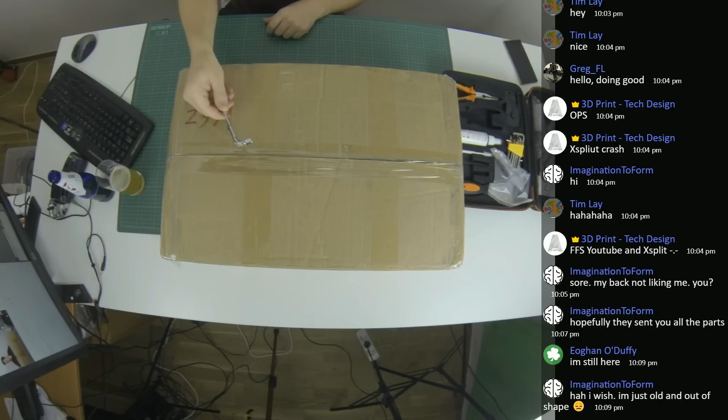I think we should start getting this up and running here. This is not the tool to cut up a box. I'm gonna switch tools. I have my trusty printer kit thingamajiggy here, and I got set up a bear cam as well. Well, it's not really a bear cam, but we can have it look at bear, or we can look at details, or look at how the studio is set up right now.

So this is the table that we are working from. We got the computer, we got a bunch of stuff I don't think I want to show you, and we have some cameras set up, and audio and GoPro in the roof and stuff like that. So that's going to be pretty fun. And let's see if we can start opening the box. How is the audio levels, by the way? Does it work? Is it fine?

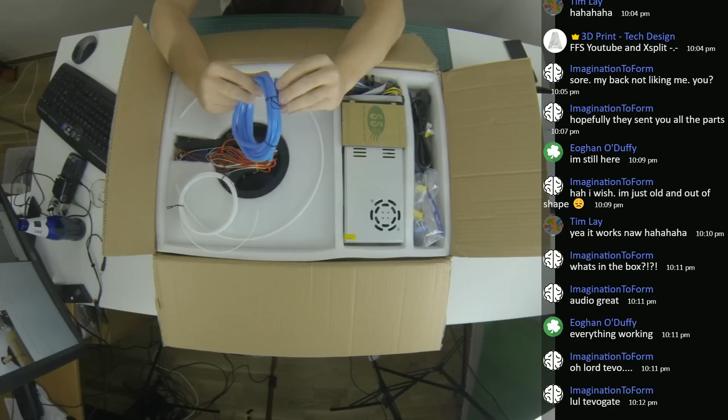Okay, we also got a lot of different stuff here. We have, not exactly sure what this is. It doesn't really look like a cable connector, but it's probably something.

We're gonna run out of space almost immediately, so I'm just gonna take this printer kit away for a few seconds, see if I can build some sort of array of stuff here. Okay, so we got that.

We got a memory card, SD card, that's very nice. We got some filament. That's not a lot of filament. Holy moly, that's a little bit depressive. But okay, maybe we can do something with that.

Bowden tube, interesting. Everything's probably gonna fall off here in a few minutes. Ooh, USB cable. We got 2 cables for the display, very nice.

So yeah, if you've watched PewDiePie, I'm gonna make PewDiePie jokes like all day. Very nice. Sweden unite? No?

Okay, we also got some cable for the stepper motors. Creator Pro clone. Yeah, I mean, this looks like a very good contender for a big printer, because it should be really easy to put inside some box, or maybe just use cardboard from this box to enclose it. Because what I've heard is that you should probably upgrade or put a different power supply on the heated bed, because it takes apparently forever to heat it up. So that's gonna be interesting to see.

And okay, these power cables still probably have to go into the motherboard. I do have a MOSFET around, but that would probably require to open things up in here, and I'm not gonna do that just yet, but maybe next time. And of course put this to 0 or off.

Cool, big fat power supply, that's nice. And here's a loose part, okay cool, we got some end stops. Clickety clickety, very good, very good.

And I think underneath, whoa! That's a big print surface. Just check that out, that's a really big print surface. Holy moly, this is...

And it comes pre-wired and everything. We have the cables around here. That's very nice, sensor and heater bed, and a cart for them to move.

But oh, Jesus Christ, this is a big build plate. Okay, and is that glass? No, it's not glass, it's... or is it?

It doesn't sound like glass. Maybe it's some sort of interesting surface. Not completely sure, it doesn't look like glass at all. Huh, very nice, very nice.

Okay, I know, I'm gonna stop. I mean, look at this build plate. This build plate is super big compared to my head.

Strange, cool, and we get a very big print surface as well. Oh Jesus, and some really annoying plexiglass pieces that we need to probably cut away. But I'm gonna look at this, and we're actually gonna put this away for now, because we're not gonna need the build plate for a little while.

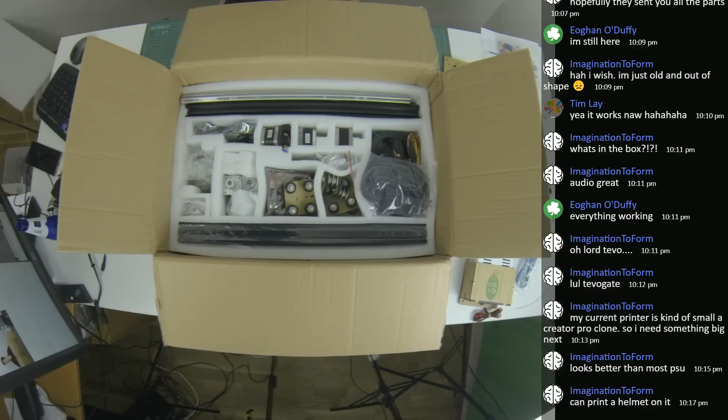Woo, second layer. Now we're getting some juicy details. Some more cable, some belts and cable arrangement. That's good, let's keep those close. We got a pretty well pre-assembled extruder contraption here.

So it looks okay. Let's see, where's the nozzle? Here's the nozzle, it looks pretty cool. I think that's gonna work fine.

We got some auto leveling here as well. Nope, that's not auto leveling, sorry, that's X or Y axis leveling. Yeah, that's a good question. I wonder where the leveling is for the Z axis. And a bunch of wires and connectors for that. But that's good, it looks very nice with the connectors to the extruder.

What else is there? There are some belts pre-assembled. Wow, hey, these are quite well pre-assembled. It looks like we're not gonna do too much assembling here.

Looking at the manual, which I have somewhere around here, let's see if I can find it. I do have the manual on the computer already, but it does look like things are fairly pre-assembled, which is very nice. So these are probably for all the belts.

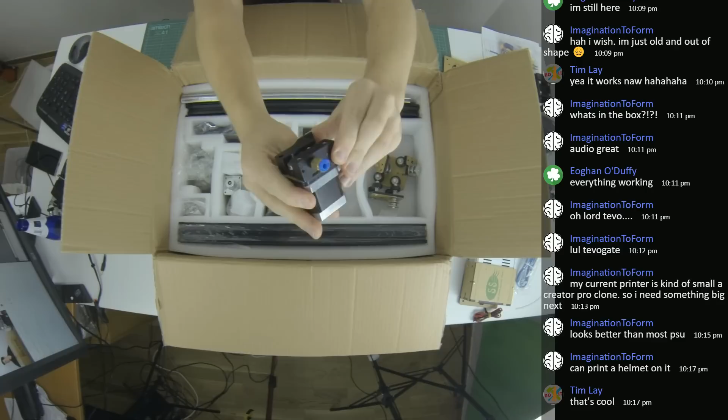We got even more plastic parts that are laser cut. Oh, I got them, this one here. The Bowden extruder, it's pretty far from a Bondtech, but it's an extruder.

Looks okay, aluminium parts, no plastic stuff. So that's nice, it's a little bit strong. What else do we have? We got a lot of bearing holders for the Z-axis.

Get a close up for you.

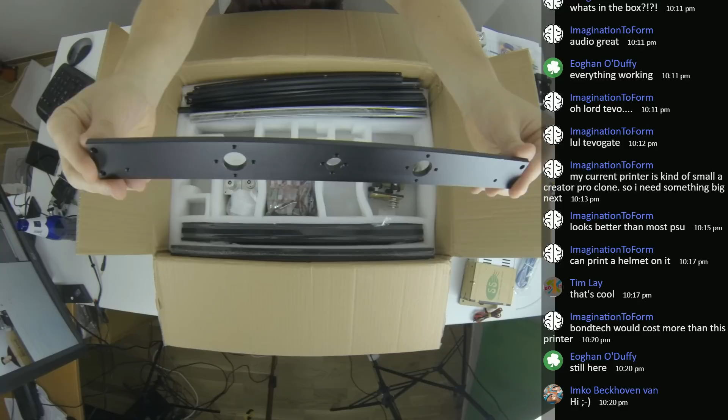Ooh, this looks nice, this looks like some actually good machining. That's pretty impressive, really hard as well, that's pretty nice.

Okay, and of course we have the card here, motherboard. Looks like a standard motherboard, nothing super fancy around that. It's probably gonna work, let's see here if we can get in as well.

We have a piece with a fan for the motherboard. I'm gonna start to have to drink my beer so I can keep stuff here. So cheers again, guys.

Ooh, we got some fun stuff down here. Gonna get to use this one here so I can see what's happening at the same time.

Okay, we have 2 Z motors. Whoa, okay, with some... I always forget what these are called.

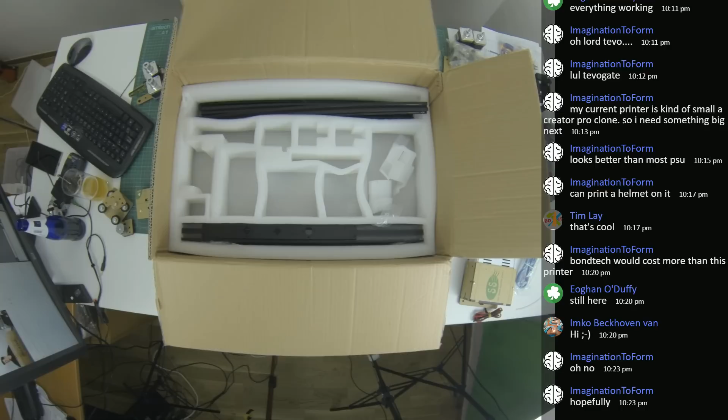Maybe there's something smart here. Oh, there's a lot of parts. It's really weird. Smiley. There's something weird with the chat in XSplit, I never know why it's doing that.

Ooh, look at this, there's some... it's not spider web, it's just something from packaging and from the manufacturing. That's weird. All right, and we have some...

Yeah, exactly, Peter. First step of any 3D printer is to fix the parts that weren't assembled with it. Ah man, this looks very nice with these parts.

I'm enjoying this a lot. That seems to be everything in the box. Do you guys see anything left in the box? Nope, I don't think so. I think we're ready to build myself in.

So right now there's no way for me to move out of here. And that's good, that means I need to build this machine before I can actually get out of the room.

Oops, okay, so we have big axles, 3 big axles. Why are there just 3 of this, double? It's interesting. So we have these double rods, hopefully you can see.

Yeah, but that's the problem. Your first printer shouldn't be too cheap, because then you can't be sure that it actually works, so it can then fix your other printers.

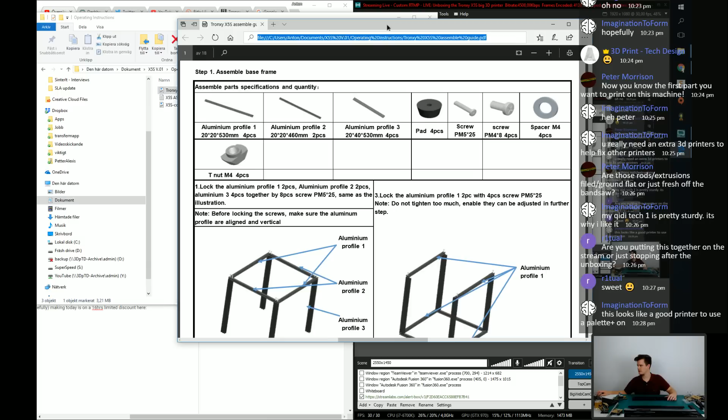Yeah, imagination, that sounds like a really good idea to use the palette on this machine, that's for sure. Okay, so I'm gonna need my measuring tape, I think. Or do I? No?

Okay, we need 3 profiles, the pads, okay. I got the pads. Alright, we got the pads, the pads are ready.

What else do we need? We need 5 by... oh, now it's time for all the screws. This is gonna be annoying to keep track of. Let's just get those out around here. These should be all the screws.

Oh, M5 is somewhere, oh we have some springy parts as well for the build plate and stuff. Oh, these are the M3, M4, and M4 washers. M5, here we go, we got some big M5 screws. Oh, there's a lot of screws in here.

Oof, how many do we need? We need... it doesn't say. 8 pieces, okay, 8 pieces. We can do that.

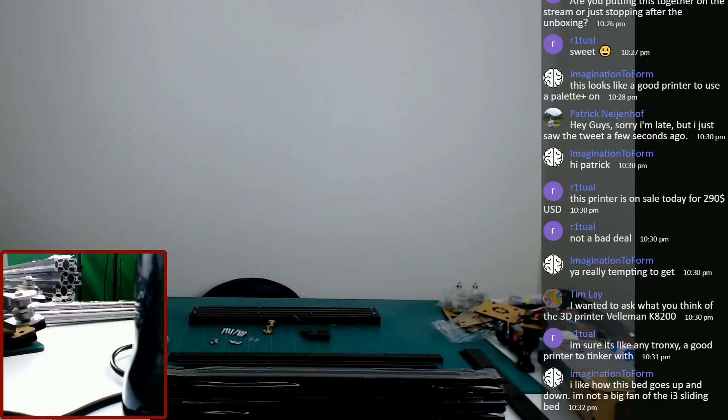Cool, so I have a measuring tape somewhere down here. I'm just gonna find my measuring tape. I'm a man of boxes, which I hear most men are, so that's usually the easiest way.

Yeah exactly, imagination. I really enjoy the reason why I chose this machine. To be honest, as an influencer you get to choose machines, and I told Gearbest that I don't want to have the Tevo, I don't want to have the CR10, because everyone else is doing those. So I wanted to have this machine, and that is actually one of the main reasons - imagination - that I wanted to have a big print volume that I can enclose easily, and I also wanted to have a Z-axis that was a little bit more sturdy, because right now most machines are...

The bed is moving, and I don't like that. They claim that it works, that it doesn't affect the model, but I believe that depending on how your model is made, sometimes it's just going to be too much force, and it should start to wobble. You can solve it with acceleration, of course, but it's not really for me. I don't like that, and it doesn't look good on time lapse, which is also something that's really important for me. Okay, cool.

We need now, so we need all 4 of these. And we needed the 2, let's see here, 460. Yep, 20, 20, 20, and we need 2 of those, and leave the other ones. And we needed 1 of the 530 - that's the one 530. Oh no, we needed all of those. Okay cool, now I'm following along here. And we needed, no, 1 of these? No, 4, 2, 4. Cool, we'll put everything else away for now. And we should be ready.

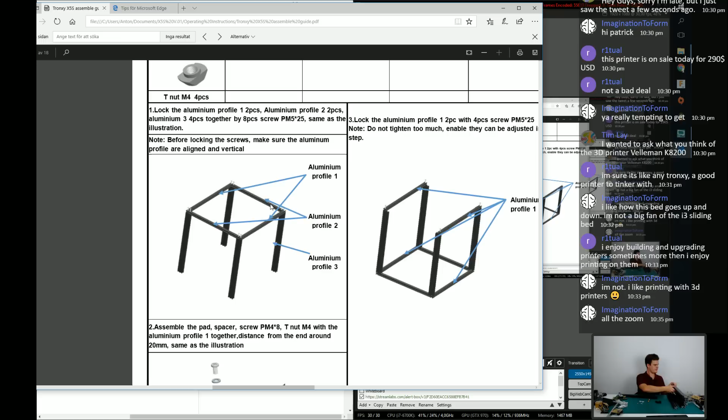I mean, it's pretty obvious. It's not obvious at all. Yeah, what am I looking at here? I'm taking these off. There's a lot of plastic on these ones actually. That's good, good for protection, keeps them looking very nice. Plastic around here as well.

I hope you're supposed to... Oh yeah, now I know what the blue stuff is, that is to fill out all of these parts. Okay, cool. Again, it doesn't really... well okay, I suppose that it's supposed to be squared. Should mean that... but how? How is it supposed to be squared?

This is a big printer. Oh my god. Because, is that it? It's just supposed to go in like that. Okay.

Alright, so from underneath, but the screws aren't going in as they should. Yeah, I agree, totally agree. Alright, let's just get this going, we need some sort of tool. We got tools.

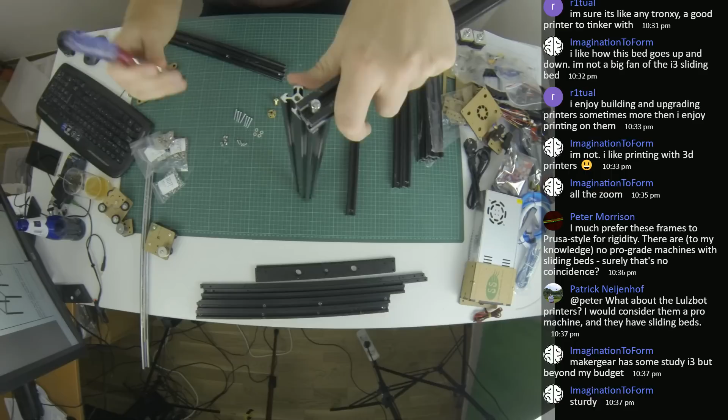There's a small indentation on these rods here, I'll try to show you. You should put the screw through that indentation, makes it a lot easier. Then you can tighten it just slightly, go in with a screwdriver. Not too tight, we just want to get those in place.

We'll take another one on the other side. There we go, we are getting somewhere. Let's remove more of the plastic before we start moving anywhere else. I'm kind of making it upside down right now, if you're wondering, because that seems to be the easiest thing. What am I doing? I'm doing this here. Okay, so let's do another one. Do it like this before we flip everyone.

Ah, Patrick! Yes, my savior! Oh, I was afraid you weren't gonna show up, Patrick. I've already started making some mistakes - that's obviously because you weren't here. My man, Patrick, you are most welcome to the stream.

Oh, I think I missed, Tim, what printer you had. Sorry, Tim, did you have the Velleman for that amount of time, or were you talking about another printer?

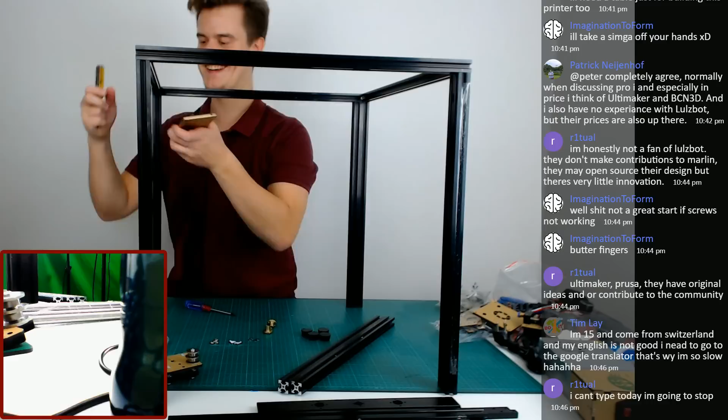Okay, now I need to find something square before we start tensioning the frame down, and that's going to be an issue. I don't know where I have something square. Oh, I do - my cell phone is square. There we are, getting squared up.

No, go ahead r1tual, just type away. But you're absolutely right, there are some manufacturers that do contribute more, and some that just ride on the success of others. For sure.

Starting to look like a frame. See if we can tighten this down here. Again, using your cell phone is the perfect square tool. This is looking good.

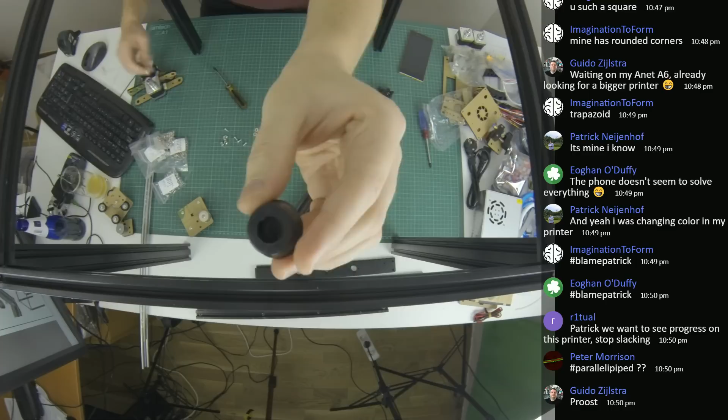Okay, first step done. Now we're going to put on some of these feet to make it a little bit easier when it's standing. Ooh, there are no holes in the feet. Let me see if I can show you - there are no holes in these ones, so I suppose we have to kind of drill those out. Maybe we can just do something like this. Yep, we can do. So I just want to push this through.

Skål! That's right, skål means cheers in Swedish.

Okay, we are just getting these done. And then we are supposed to take one of these screws. Maybe I can do it like this now, because we've come this far. Can you put this? Yeah, here we go. So you want to take one of these screws, a washer, and push it through, and one of the M4 T nuts on the other side. Just tighten it a little bit, I suppose. And then we are going to push these in somewhere, maybe just somewhere out in the corners. I don't know if it matters exactly where they are.

There we go, then we are locking those up. No, Patrick, no excuses. Pushed.

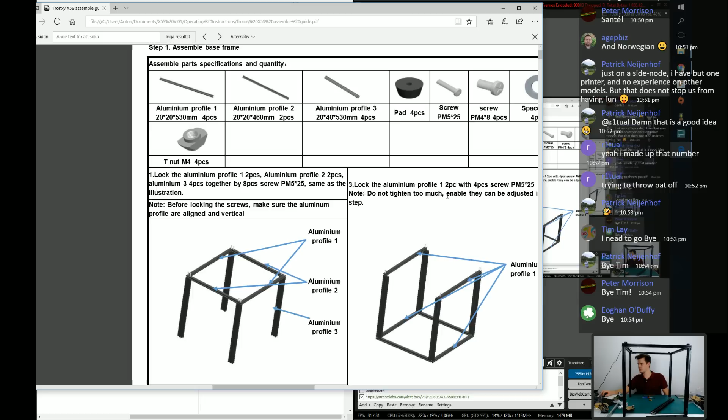Okay, there we go. Now I believe it's time to flip some things over here. Let's see, how do we do this? What does the manual say? It says lock the aluminium profile, blah blah blah, do not tighten too much. Okay, I did kind of do that. All right, so let's see here. I don't know how to flip this frame, it's so big.

Camera. Oof, that was close. There we are. We're now standing on some feet.

Again, it does not want to keep itself either squared or nothing. It did tell me not to square it up too much, but it doesn't feel that good.

Okay, let's see. Which directions are these going? These are going... I suppose that, what?

This doesn't make sense. This does not make sense at all.

Okay, Patrick. It looks like we did a mistake here. So if we are looking at me and my mistakes, looking at the frame, it does actually say profile 1 and 2, and profile 2 and profile 3, and then we're going to use the ones again over here.

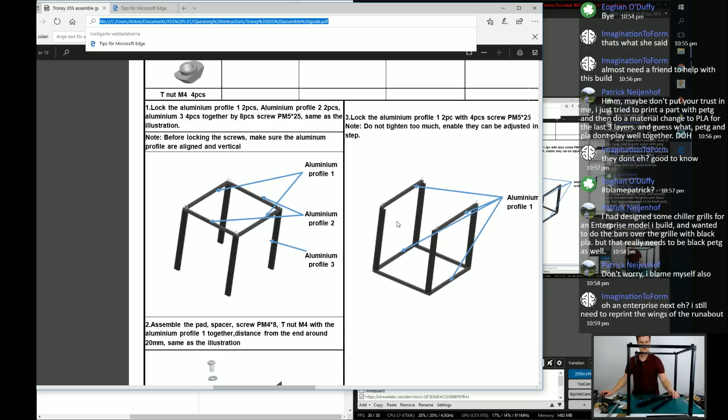It's the 460. I'm just gonna measure it again. I'm pretty sure now, but yeah, this is the 530. And all of these have a lot of holes in them.

It's not 480, it is the 460. Yep, okay.

This one is going on the, what's it called? On the top layer. We are taking 2 of these, putting those away, because we are just using 2 of these. All right.

It is starting to make sense again. It's not supposed to be easy. Enterprise next.

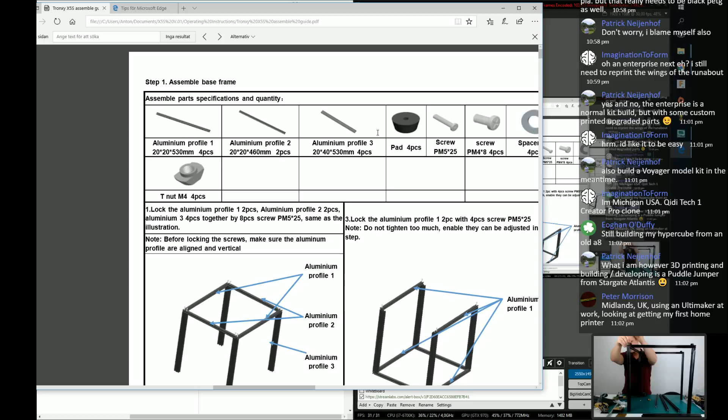Midlands, nice. All right, Peter, I think you've come to the right place. We are quite a few here that would probably be able to answer any questions or thoughts you have.

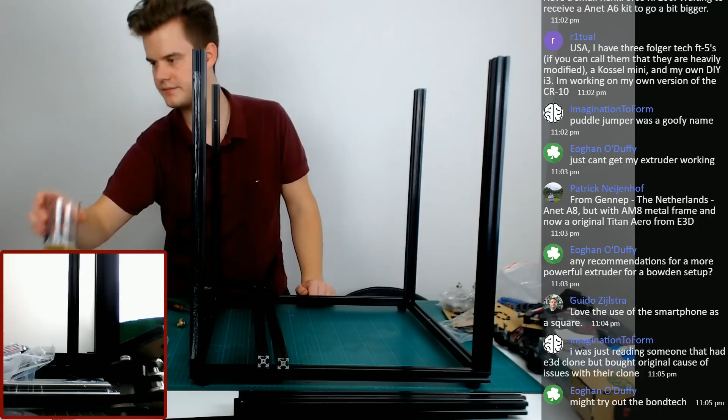It's either, I mean, Bondtech is kind of like the standard. You see it in most new machines, so I would absolutely recommend using that one. And they have great support as well, so it should be easy to get going if you have any questions.

Okay, sorry. So we need more of the M5 screws. We need to have the profiles in the same place, of course. That makes sense, just checking through the profile and stuff. Okay, cool, we're actually getting somewhere. I just need a few more of the M5 screws, M5 by 25. Oh, I need 4, of course. Duh.

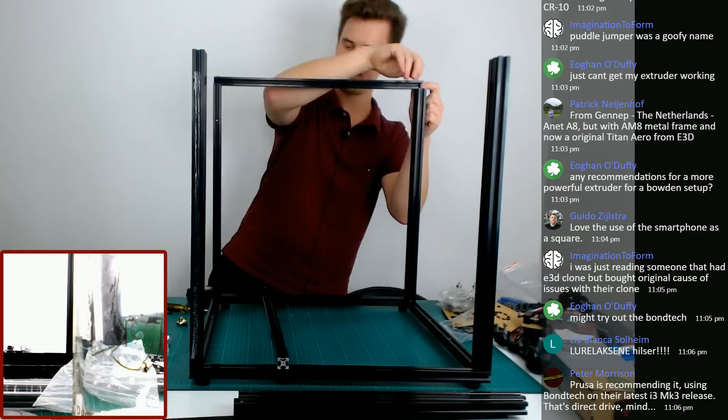Let's see, it's starting to get pretty nice here. Yeah, I mean, if Prusa is recommending it, it's something that you know is going to be good. And if he, yeah, you know.

Okay, so there we go. Yeah, the clones, I mean, the clones when it comes to both, what's it called? The Bondtech and the, what's it called? E3D hotend. I mean, as soon as you start working with the clones, you're gonna have some issues, and you don't want that. Not on a high quality printer.

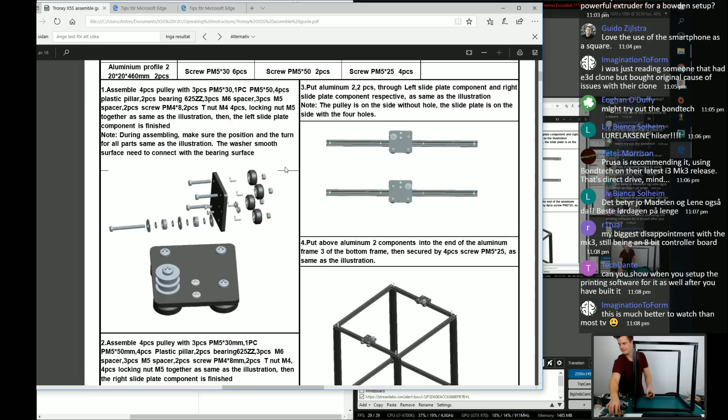But we are now past this step, so it's actually time to, let's see, we are on step number 2, assemble slide plate. We have one base frame, we need some of the bearings. To be honest, I think that I actually already have these parts pre-assembled, or someone did that for me, because I got those parts here. So, like, we have everything that we need. It's just a matter of taking away this ugly protection cover.

Which we all know is a pain. Do you guys have any flashbacks from the Anet live build? Oh my god, these people, I do enjoy and I appreciate that they pre-assemble most of the machine, but they could have removed the brown protection. Oh my god. Hey, yeah, TV is not this. Well, maybe not the same entertainment, but it's certainly more informational.

But r1tual, regarding the board being 8-bit, doesn't, I mean, are you sure that they are, enjoyment, yeah sure. Are you sure that that's actually an issue with 8-bits? Doesn't it handle everything really good? I think that, I mean, that's his defense, I suppose, as far as what I've seen.

Oh my god, I'm gonna freak out here with this stuff. And this is also just way too tight. The bearings are hardly turning. But okay, maybe that's one of the things that saves cost as well. China master trolls, yeah, right. I don't know, maybe we shouldn't do this. I'm just gonna leave it as B. Okay, cool.

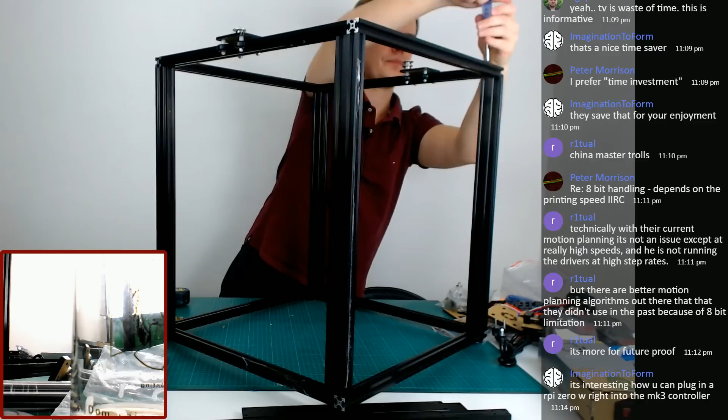Yeah, that's true. Ah, there we go, cool. Ooh, that's not too loud, actually that's pretty nice.

We forgot the most important step of the last step, which is here: having a successful drink. So every successful step - I mean not successful as in we did it on the first try, but successful as we managed to do it - we got a cheer. So cheers.

Okay, so this step we need the 4040 profile, which is actually the only one left. So that's pretty cool. We need the extruder assembled, and hey, what do you know, we actually got the extruder assembled. Damn, we're making some progress here.

We also need one of the switches. So the question is, where's the switch going? Don't know where the switch... Oh, the switch is going on a machine. Okay, but we already done that. Oh my god, we're done with this step as well.

Let's see, let's go here. We're almost done with this step too. So we are going to take... so this is going to be assembled something like this. Maybe we can show it on this. It's going to be something like this.

And we need the extruder on top of here as well. The question is, which way does the extruder go? So obviously it's going to want to... okay, it's not obvious at all. I want to see which way it's orientating.

Okay, I'm going to read in the chat. Of course there's winners, Peter. There's always winners when it comes to a printer building drinking game.

Okay so the question is just which way the extruder goes, but I suppose that we can move it around later. Yeah, it does look to be like this way, so we are going to put it in like this, I think. Ooh, that's tight. Okay, there we go.

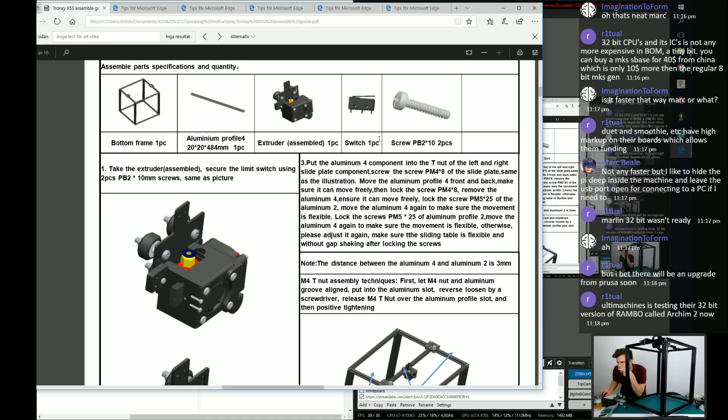Aluminium 4 components into the T-nut. Oh okay, so it doesn't say which part that we need, which is a little bit annoying. But we're using an M4x8. And I suppose...

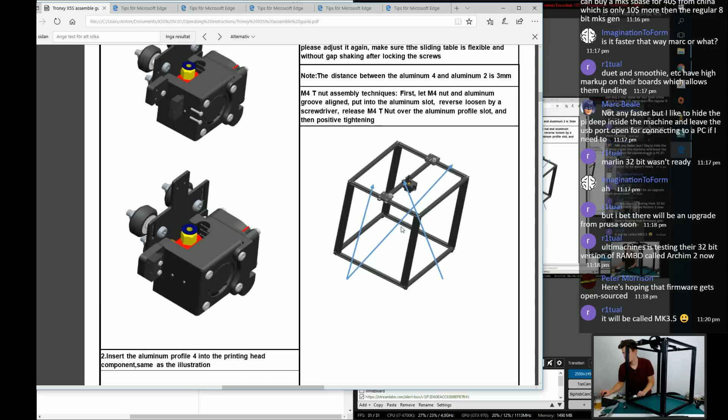Lock the profile or... again, okay so we're gonna use the M4x8. I think we had a few of those.

I'm a little bit confused right now, let me tell you why. So we have this construction - on these parts we are putting this axle, but there are no exact screws here to put in from below. It looks like just an M4x8, 3.5. Okay, so let's go with the shortest screws. There we go, 4 of them.

Fine, I'm just gonna wing this. It's probably gonna be right. Don't you agree, Patrick? Isn't this the way that it's supposed to go?

Ah, RAMBO. It's cool.

I really love how you guys are nerding in with all the stuff. Meanwhile, I'm trying - I really am trying - to build something here. It's not looking well. Okay, so we are putting in these screws up here very loosely. I assume we need to put in both of them. Parallel pipes.

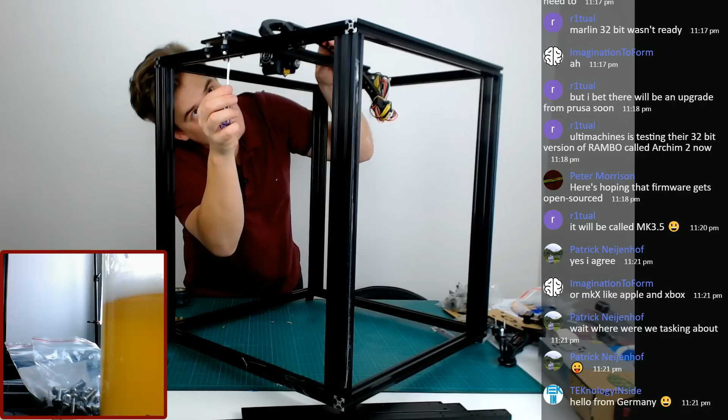Okay, cool, so I'm just going to tighten these up a little bit, not too much - we don't want them to move too freely. But we are going to want to move the whole axis over, so this step is smart. So move everything over and kind of tighten them again just to make sure that we can rest the whole axis over here. And then we prepare the other side.

Like so. I'm gonna have to go back and clean the laser cut parts one day. It's not gonna be today, we don't have time for that, that's for sure.

Cool, so now when those are in, we are untightening this one here as well - again, I mean, not as well. And moving it over, making sure we are putting it in on this side. There's a lot of putting in right now, if you know what I mean.

Okay, 1 and a 2. Cool, now we want it to be, of course - how are we supposed to do this? Maybe go 1. So how do we know if it's squared? That's a good question, Anton. Let's just eyeball it - yeah, what a great idea.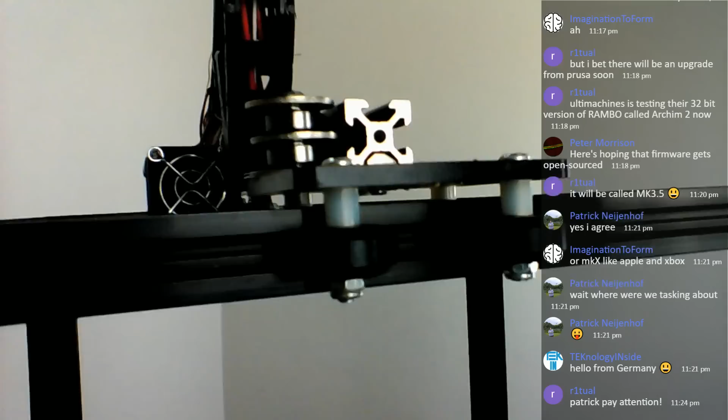Okay, so if we just take a little bit of a zoom here - so what we just did was that we put on the extruder, as you can see. I got a lot of cables for that, just give me 1 second. And we also tighten up in here, so we're using these M4 locking nuts. That looks like it's actually locking, maybe I should tighten a little bit. And there's 2 on that side, and then 2 on this side as well.

And it looks fine. Yeah, let's see if we can get it in this view here. Selfie, printer selfie, I mean, who can complain? It's not perfect, but it's probably pretty good. I'm gonna say that's okay. We'll have to do some calibration later with squaring the prints and stuff like that.

Ooh, there we go. Let's just check the manual once more. Oh, it makes all of these like helping stuff as soon as I try to do things. Cool, we are finished with that.

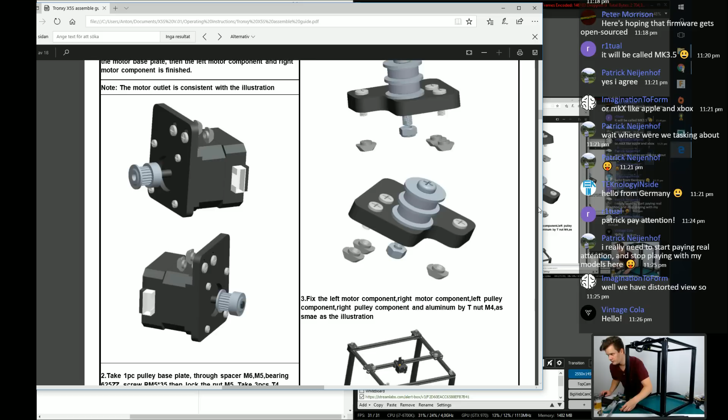Now we need these parts. And let me just check - we got 2 parts here. I think we already have those parts assembled as well, more or less. Here you can see those parts, we've got those more or less assembled.

We are going to need the M4x8, a lot of those, as we just did. Cube printers! Yeah, I know, imagination, but it's the only PDF reader I have, so believe me, I know.

Hey Vintage Cola, nice to see you. And hi Ben! Woohoo, you made it! So nice that you can join us today. We're making some progress here, as you can see.

So we need 10 screws, that's a lot of them. It's a lot of screws.

Oh, and we are dropping - we don't want to drop screws. Okay, so how many do we have here? We got 1, 2, 3, 4, 5, 10. It's awesome.

No worries, Ben, super nice to see you here.

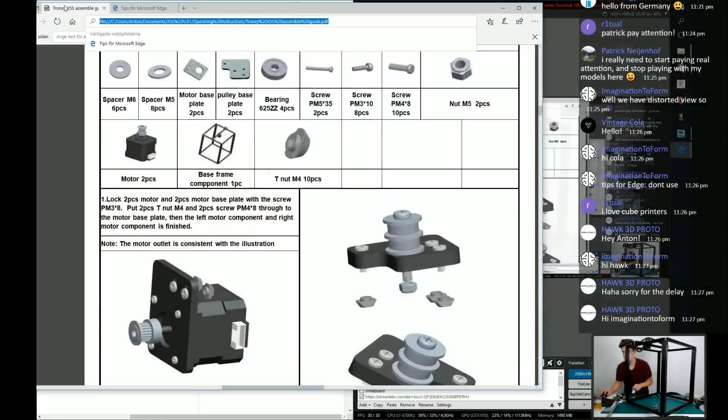Cube printers, okay, so we got that done. What else do we need? We need the locking nuts, of course, and I think that everything else is done. So I'm gonna need those, and we need, well obviously we're gonna need 10 of those as well. Or obviously, but I mean, I assume we are. So 6 and then 2 for each motors. There we go.

Okay, so the motors we have - is it these ones? No, not those. It's these motors over here, and they're actually not pre-assembled, so we've got some assembling to do, which is fun. We need motor base plates, got all of those here.

Oh my god, these bags are the worst. Look, they're breaking apart. Ah, come on. The Hulk. Oh, I forgot, totally forgot - last deck was successful, so we're gonna have a drink for that. Ah, very nice.

All right, so motor plates, that's where we're at. We got one for X and one for Y. They're actually labeling the parts, which I enjoy a lot. It's a Swedish thing, you know, or Borat thing, which is also fun.

That's some water, that's good. You're so healthy, Ben, it's really good.

You want to know what's not healthy? That is spending time removing the brown covers of these laser cut parts. It feels like everyone in China is assembling at the same factory, using the same laser cutter with the same bad settings and the same raw material. But who can blame them, it's pretty cheap.

Vernors. Good, I'm having the 1664 Anno, which I believe is a Swedish brew. Ooh, are you gonna vlog the trip, Ben? Is it a 3D printing trip?

Okay, while I'm doing this I'm actually gonna sit down again, because I'm getting old, you know. Old. It's a ginger ale, that's nice.

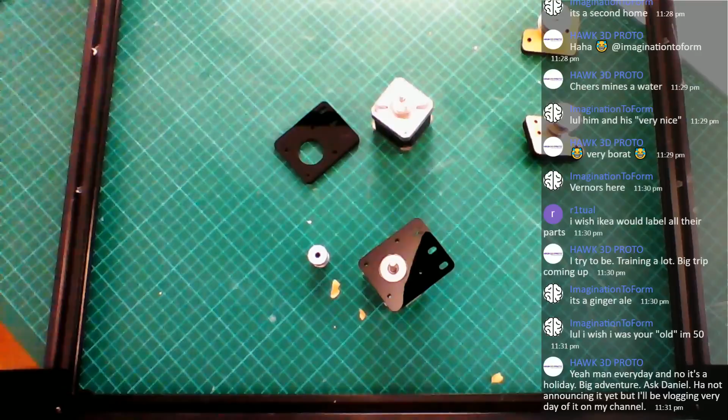Okay, cool, and what are the small screws here for the motor? We need 8, what, 2 pieces 8, and 3 by 10. And 3 by 10, we got those somewhere.

Dropping screws everywhere. How many do we need? Need 8 of those, right? Yep, 8.

Come on, one more screw, one more. Canada.

By the way, how old are you guys? I'm thinking, because maybe some of you aren't okay with me drinking a grown-up drink. Just want to check what age you guys are. That would be bad if you're not allowed to see that. Yes, you need to visit Sweden, that's for sure. 21, that's good. You're halfway to meaning of life. You'll understand it when you're there, I hear.

Okay, so we are just putting down the screws in here. I'm gonna find one of the smaller screwdrivers. 31, 14 technically. Cool.

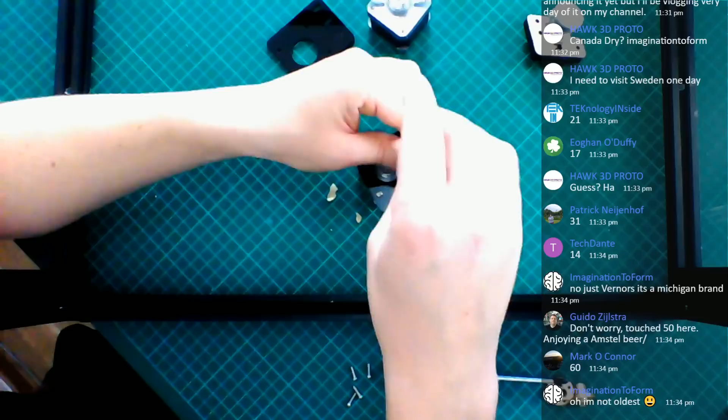I did the wrong screw. Let's see, no. It should be M3 by 8, not the 10. Jesus, that's boring, I'm pretty sure it tells me to use the 10 as well. I'm gonna keep the 10 screws around.

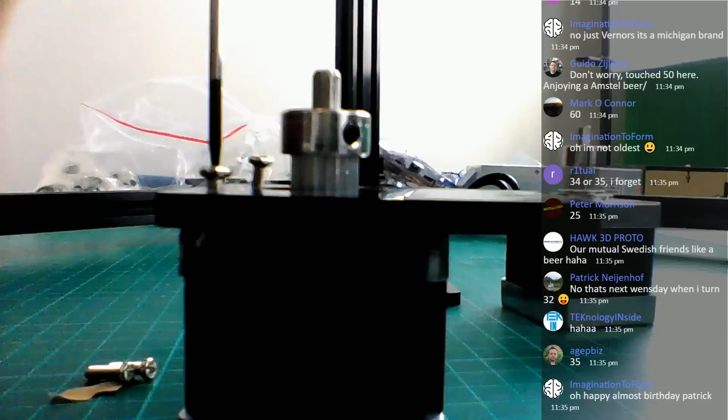Wait, I'm not following along at all. These screws are supposed to go all the way in the motors. It feels like they are bottoming out. Okay, I'm gonna try one more screw here. Hey, almost birthday. There's obviously something wrong here. I'm not supposed to use these screws because that doesn't work, and it doesn't tell me to use any.

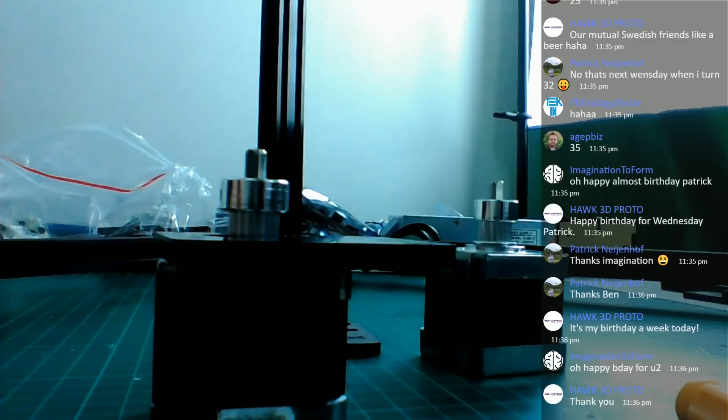Okay, I'm probably using the wrong screws. It should be M3 by 8, I suppose, which are the smaller ones. So sorry about that, I need to find some more screws. That's just the way it is - when I do, Patrick does mistakes.

Okay, there we go. Just one more.

Okay, now we are back, and these screws should be better. There we go, they are tight and flush. It's good, put these in.

Let's see here, it looks like we are also going to... yay, emojis! Screw vision! You gotta have the details, it's all about the zooms. You really want to be able to zoom in very well when it's needed. And it's never needed, I'm just kidding.

And as far as I've seen, it's actually supposed to be in this orientation. I'm going to put it like that for now. I'm taking the second one as well. Oh, you can't see what I'm doing. That's not good, we are just tightening this up a little bit.

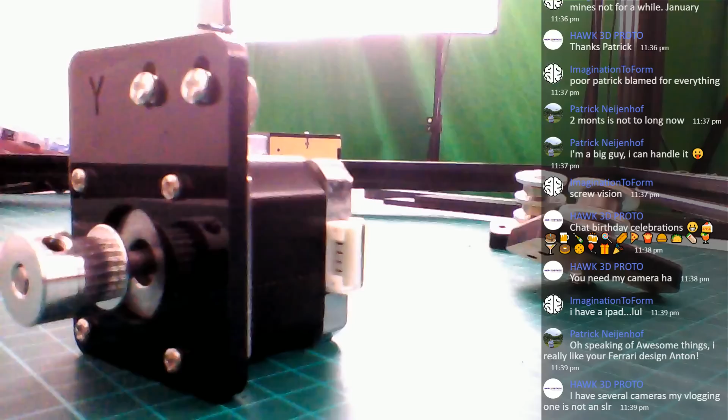Thank you so much, Patrick. Hey, I do have that car somewhere. Can you see it? It's over there in the background, behind some others. Oh yeah, behind the resin printer. I still haven't gotten the replacement screen for that one. What else, do you have some other printers in here? We got those guys up there. And I think that's it. I have a Sigma down there in the corner. I love this room, this is really the best room I have.

Okay, so let's go on with the other one.

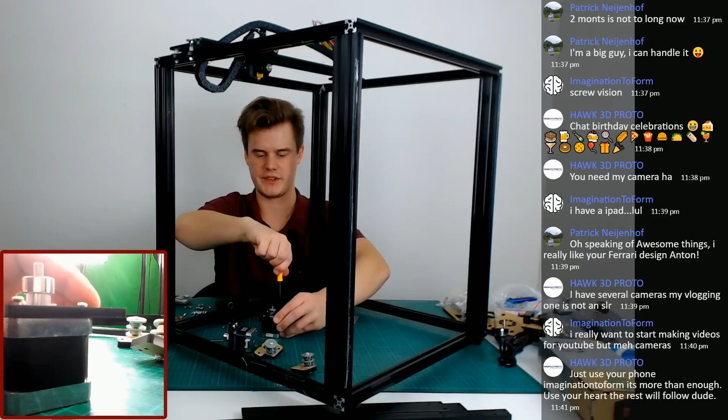Yeah, I mean, again it's very difficult because I want to say that cameras doesn't matter, but I'm one of those guys who want to have a little bit more quality. For example, Jon Olsson is one of my to-go-to guys. I really want to do good quality, even if it takes more money and time and space and computers and everything, but I feel like it's a pretty nice thing to have. I like quality. But yeah, if you want to do most kinds of stuff, you don't need quality, so it's just about what you want to tell. It really just is. I really notice my videos that are just unthought of and just quick, they end up being too much because I'm not focusing on what I want to say. I just want to do a movie, talk about the stuff I'm doing, but I'm not tailoring it for presentation. And I really notice that those movies aren't the best ones, people don't really enjoy them. But the movies where I try to be a little bit more informative, maybe even do a script, those are usually a little bit better.

Phone upgrade, okay cool, I think we are ready. So what are we doing? We are putting the motors on. What's that? That is a belt and a tie. Oh my god, it's soon belt time. That's pretty sick, we're already at the belts.

Okay, I took that drink a little bit too early. Cool, okay, so let's look at this here, we are putting on this stuff like so. Okay cool. Which means that looking from where we are now, we are putting the right to the right.

Oh, we totally forgot to put in some screws in these ones. We need to do that a little bit quickly. Let's put in the M4s in these thingamajiggies.

Hi, Techno again. Oops, my bad. I think I put on one of the motors wrong because the connector is... okay, I'm gonna show you with this camera here. So this one can be mounted because it's facing down here, but this one cannot be mounted because we have a connector there. So I'm gonna swap the connector around probably that way, and things are gonna be fine.

Of course, imagination, it is actually simple. I mean, I hope so. But to be honest, it's not that many weird parts, it's just a little bit of patience. Again, I'm doing this as live streaming. You can do it, I believe in you.

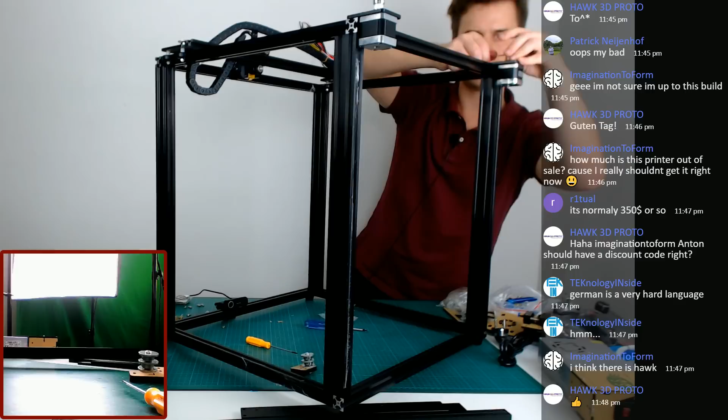By the way, Ben, did you check out that YouTuber I recommended, Alex Steele? If you want to check Alex Steele out, he's a really cool blacksmith. I don't know him, I just really follow his channel, and he lives quite close in the UK as well, so that's really cool.

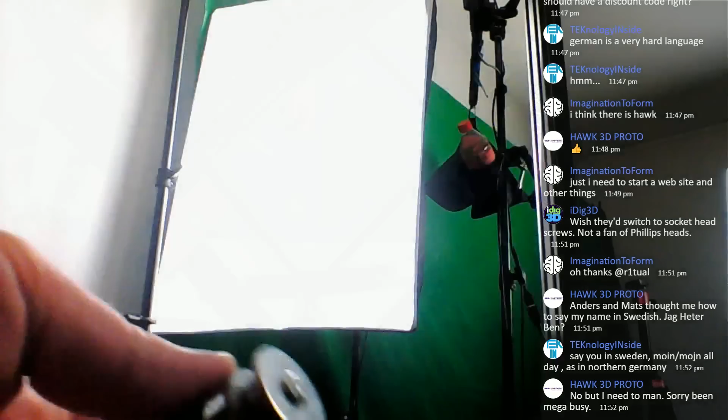So what I'm doing now is just preparing these here. You can see, put on the screw cam. So these are the ones I'm preparing right now. These have 2 bearings on them. I think these are pretty cool. Imagination.

Moin moin. Isn't that Finnish? You, du. That's how we say you in Swedish.

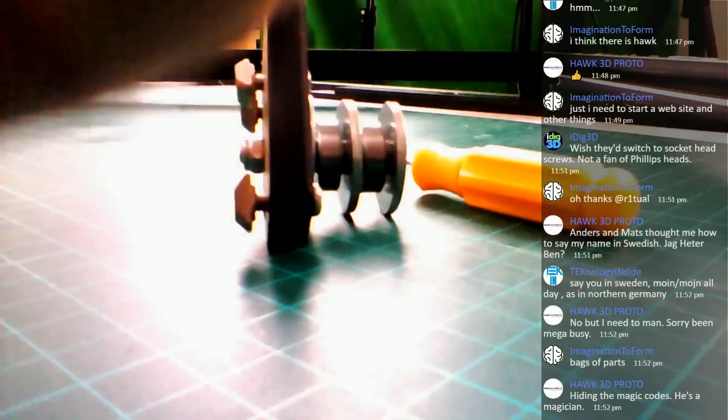Okay, we got one done. We need the other one. Hiding the magic codes, yeah I know, but I don't think I actually received any codes. Let me just check one more time in the mobile. I actually got them on Skype and that doesn't work on my Windows 10 computer, which is pretty weird, I must say.

Nope, I just got some codes for some weird, what's it called? Some weird... do we see what I'm doing here on this one? Nope.

Battery banks, and I don't think that's relevant for anyone, really.

Oh come on, come on. But I would love to hear what you guys think about that whole story, not story, but the whole idea of how the manufacturers are working.

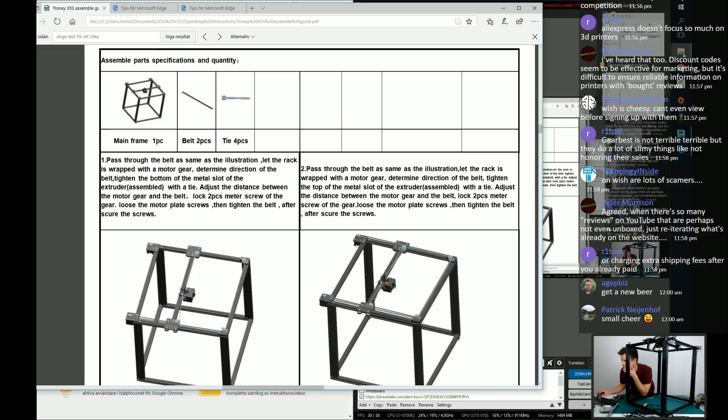Now, I did have an extra image here. Small cheer, get a new beer - I'm gonna get a new beer as soon as we're done with this stage. Cool, so I did get... oops, did I just start a game? I don't think I did.

Where are we, there we are. In this step we also had videos and pictures, something with the belts. I'm not completely sure what this shows, but it does show one of these. Up here in this corner, we can see that the blue one, which is this one, is supposed to be on the lower, and the red one is on the upper. Maybe that makes sense, maybe it doesn't - I do not know.

And again, this is watching from that side. So okay, let's start with one. Let's check if the belts are equally long - they seem to be, cool. Let's take one of the belts, and we are going to run that belt.

Okay, I'm just going to see - yeah, okay, I'm going to check the manual. I can't see what you're typing right now, unfortunately. But this belt is then going... Oh, what? What? This doesn't make sense at all.

Okay, so blue belt is down, it goes from... I really want to rotate the picture. That's good, that helps, so now the picture is the way I'm doing this. Okay, cool, so we are putting the belt... wait a second, is this frame really... yeah, it is square. Cool, so we're putting the belt through up there.

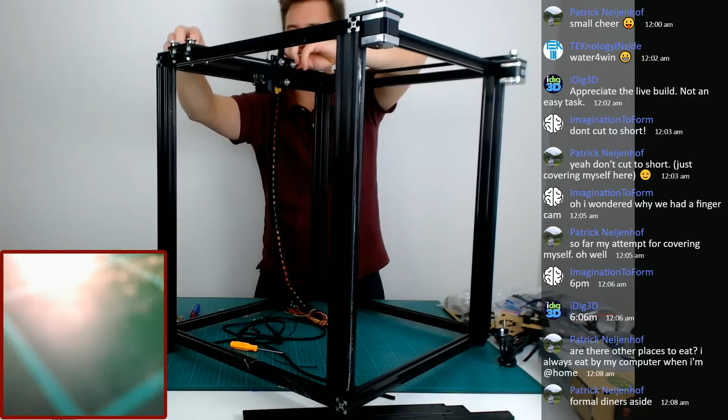There are no other places, that's right. I want to have it a little bit tighter, but I don't know how we can do that. Maybe if I loosen this, does that matter? Yeah, it does. Okay, so it's a little bit loose over there, which means that it should be able to... I should be able to tighten everything up a little bit later.

So by loosening the mechanics, I should be able to tighten the belt as much as possible now. And then when I'm ready, I can just tighten the mechanics and it should all be fine. There will probably be some functions to tighten the belts elsewhere, but right now I'm just doing it wherever I can.

So that looks good, we have quite a long piece here that we can cut off. Probably, this is just one of the two belts. Yeah, it could be, but I don't know actually. I'm not a mechanic, so I'm not sure exactly how bad that would be. But I see your point.

This is great, I can tension the belt by pushing these corners out. It's good, very good. All right, let's do the other one, which then is the red one.

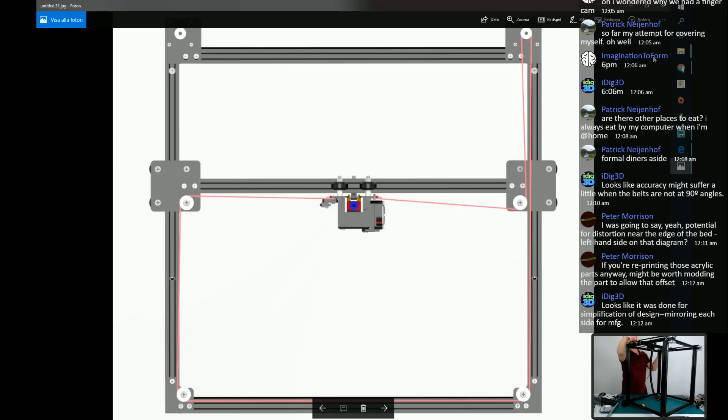What I don't like is that the belt is actually pretty close here to cut in itself. Let me see if I can show you guys that a little bit closer. So here, the belt is pretty close to touch itself, and you can see it's all done together.

Yeah, could probably do that, but this here could like touch together, like so. So I really need to have this tight to avoid exactly that. So we're just gonna drag this around on all the other corners.

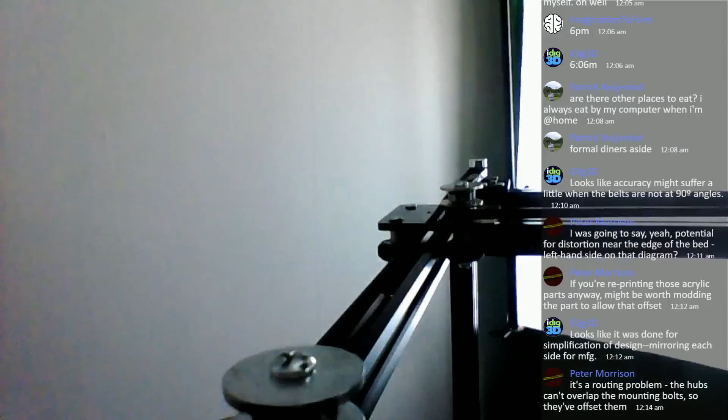Let's see, and this one goes where? Oh, it just goes over there and then back. Cool. Ooh, this is starting to feel and look very good.

Another of the zip ties. They are really not good quality, but they are what they are. Cool, now I want to tighten this corner, just push it out and lock it in mechanically.

Yeah, it's a little bit different. I feel there's a difference on the two motors actually. Sorry, the two belts - one is definitely looser than the other one. Yeah, that's true.

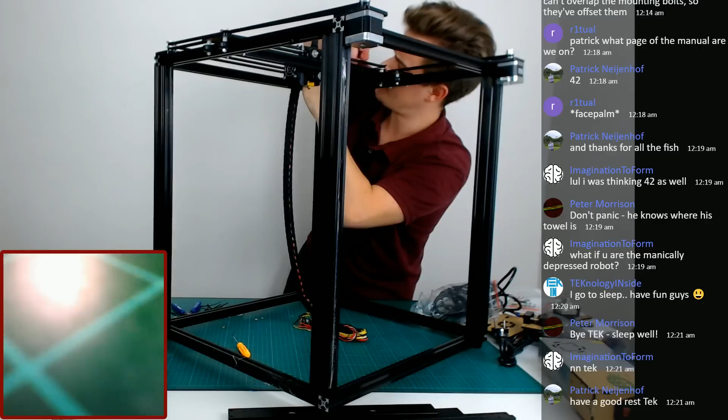Maybe? Oh, come on, you. There we go. There we go, whew. That took a little bit too long. But now it's spinning as it should, I think.

Yep, we are moving motors in all the directions. We're gonna cut away a little bit of the belts, not too much. I'm gonna keep some in case we need to fix them. Yeah, okay.

It is moving, but it's also touching, or no? Yeah, okay, it works. It is centered now, but I know where, I get what you're saying. I'm gonna leave this a little bit and see if it helps. It's pretty cold in the room, so maybe when it gets a little bit hotter, it's gonna help. Because I don't feel...

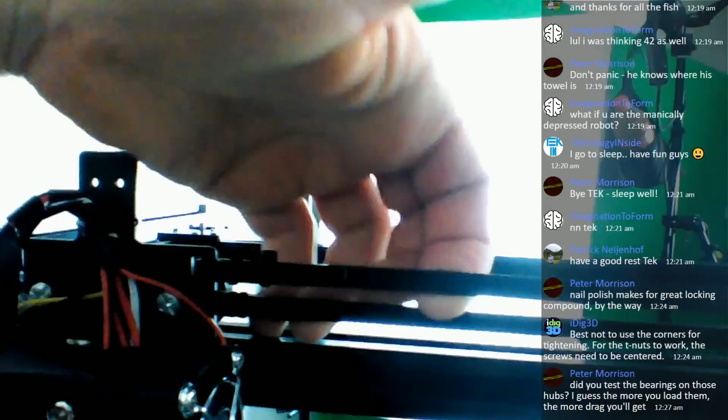The next step that I'll probably do tomorrow off camera is just unload this, because the top belt is pretty okay, but the lower one is just too tight. And you can see here on the motors, I think you can see - where are we? The motors, it's just a little bit too tight, so the plate is actually bending upwards. And the same goes for the other one, so I'm gonna fix that tomorrow so the belts are a little bit better.

And I think this belt here could be a little bit lower. I'm gonna line that up a little bit tomorrow. I don't want to spend too much time on that today, because you guys don't want to see too much of that, I suppose. It's just tinkering.

Ah, super! Very nice to hear.

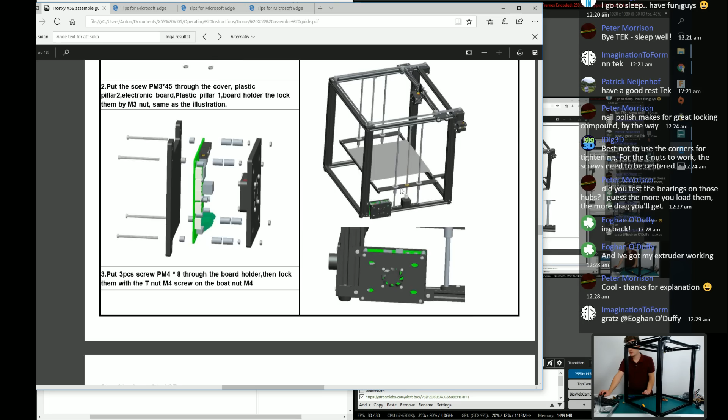Okay, cool, so this is where we are at. Just checking here down below, because as we said before, one of the parts for the Z-axis was broken, so I think we don't need that. I think that was actually just for that part. Yeah, okay, cool. So we are then here.

We got the motors. We need to switch one of the parts here on one of the motors. And what else do we need? We need these two here, those two parts. What else do we need? We need a foot locks. That should be these big parts. Like so. We need a bearing set.

Is this one gonna get greasy? I think it is. There we have the bearing set. Linear bearing screw nuts, M3x8. Ooh, okay. I totally forgot which these ones were. These were M3x10.

So let's see here what we need. Hey, that's super nice. There's so many screws here. M3x8. Cool, so we need a ton of these small, very small screws. How many did I need? 24. I don't know if I have 24 left.

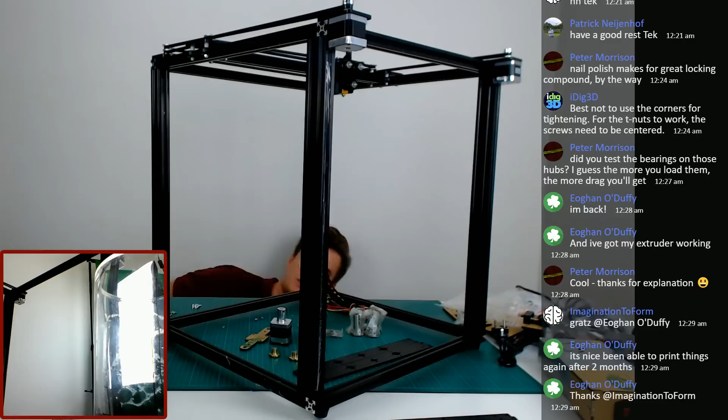Putting the screws back in the bag. There we go. And then we need the T-nuts. That should be all.

So if you guys could choose one free printer, any size, any price range - okay, maybe not any price range, but any printer for consumers - what would you choose? What would you choose? I see.

Cool, so first of all, let's just flip this. Just remove this plate because it's broken. And again, it's really fun - it must be like the quality control checked it and saw that they should throw in a new plate there. But I mean, again, they could have just fixed it for me, but nope.

Let's make a Form 3 or Form 2 - that's nice, that's 2 good printers. Oh, that's long screws. Yeah, it does look nice. I need a better... there we go. Oh man, don't tell me these are the screws keeping the motor together. I think they are. Oh.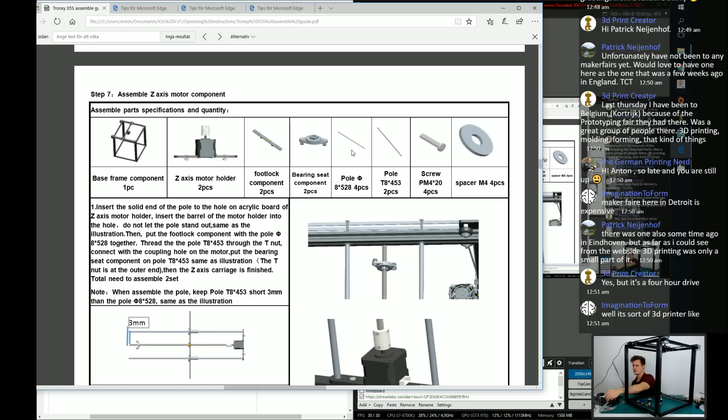Okay, so we are doing that, and we're leaving around 3 millimeters up there. I know this is not how you do it, but this is how it went down. Oh, it's so greasy here.

You don't want to bend those rods either. Why is it not easier here to remove? I need to find a knife. Oh, I have a knife somewhere. There we go, knives, knives are good.

Okay, so it's rod time. We got 4 equally long and 4 not so long.

One more beer it is then, after this step, I suppose. Cool, so where are we at in the... we need to do like this. What, are those screwing in from above? Ah, cool, okay.

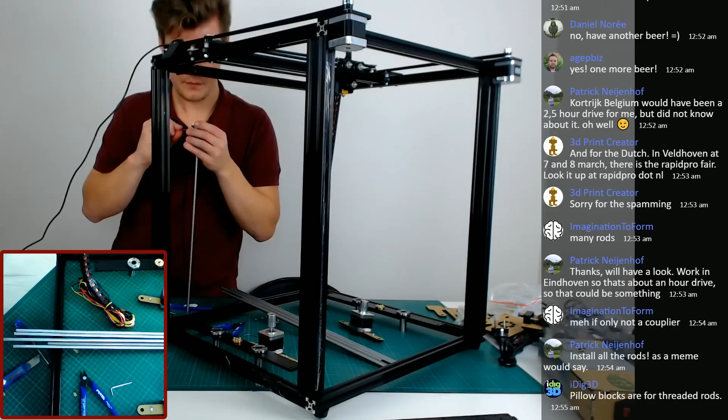There we go, now it's moving. And it should go through this one, of course. There we go, then we have the axles coming through.

So you have, let's see how we do this best. One there. And one here.

Okay, and now somehow we are gonna want to put this together. Somewhere in the middle.

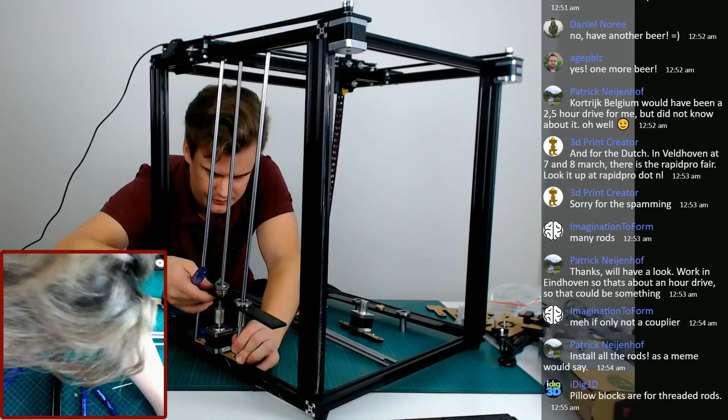Whoa, not good, not good. I don't know what happened, it locked itself on the... come on, it's locking itself to the coupler here, and that's not good. There we go. Whew. So I'm gonna tighten this here first.

If we can move it to the middle. That's around the middle. Sorry, I can't look at the chat right now, I'm trying to fix things. Okay, like so, and just gonna untighten this one here. Doesn't matter if it falls down. Ow. Cool, okay, now we go.

They're supposed to go into these holes here, but don't feel like they fit. Maybe I don't need to tighten these ones here, of course. Of course I don't need to do that. Because if I don't, maybe they can all move around a little bit.

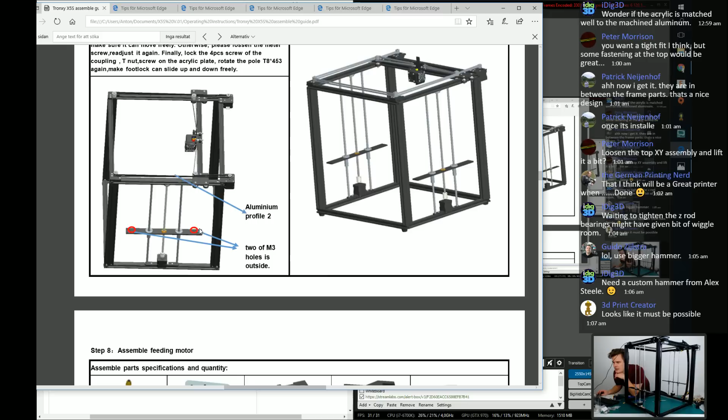Hey, but that's looking good, check that out. Progress! Woohoo! Cool, so what is the next step? The next step is the screws are on the right side. I already have this, so this is pre-assembled, which means we are skipping a step, really well.

I'm gonna just hold on one second. Oops, I am going to just wash my hands. Ta-da! We got it, clean hands. Very nice.

All right, let's go ahead with the next step. So we are putting this at one of the motor sides. Okay, and we need some M4s for that. So which way is the... Huh? Okay, so it goes like that. That looks right. Cool, so some M4x8, which means M10, and 2 of the M4 locking screws.

Let me check. To be honest, I don't know, but it could much well be so. I spotted something else, it is this here. I hope there's some technique for this, because there is an end stop here, but nothing to hit it. So that's probably, I don't know if this should be put on the other side. Probably it should be, yeah, it should probably be so it hits this one here. But it's also not fitting there, so let's see if I have to do something about that. But that's a potential error spot. So again, M4 screws, there we go.

To be honest, I think this type of extruder probably has a PTFE in the heat break. I don't know exactly which model it is, but I'll have to investigate that. But it looks like one of the standard stuff from China. Standard Chinese stuff. And yes, I know that I'm not taking away the brown covers, but that's just how it is right now.

Cool, we have our Bowden on site. Yeah, it's magic. Cool, what is the next step? We put that there. Ooh, is it build plate time? Or is it? Yeah, it is. Oh, nice.

Towline brackets, okay cool. Heat bed beam, what beam? Oh, the beams, the beam maroonies. We need the springs. Now we got a bunch of stuff here. Laser end stops. Yeah.

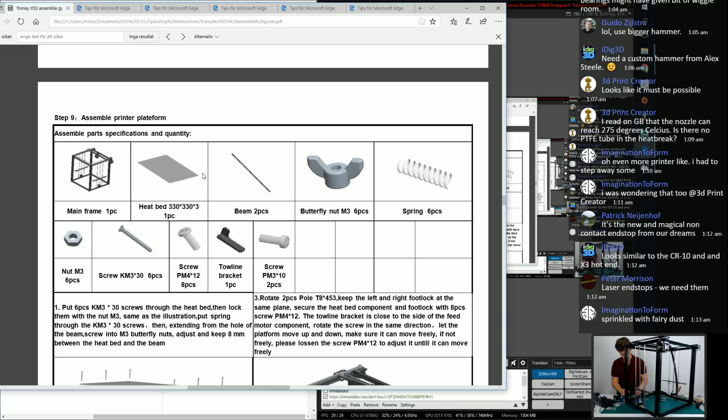Good, what else do we need? We need butterfly nuts. Then you know it's about the printed bed. 6 of those, we actually got some spare ones. M3 nuts. And M4x12. You really need that now?

Okay, I'm just gonna put some of the screws back. Yeah, it's in the same step here now. Feel the movement. Yeah, for the rods, it doesn't say anywhere that I should put in some screws from below, but I suppose that's something I would do, probably when I turn the printer around or something. So let's see, what else do we need?

We need an M4 by 12. 8 of those. That is... that is 8. And what else do we need?

We need a towline thingy. Sounds so cool. Ooh, that's printed, nice. In other words, it's going to be bad tolerances. Okay, so then it's the M3 by 60. Those are really, really long. By 60? Are you sure it's by 60? I don't think I have any screws like that anywhere at all.

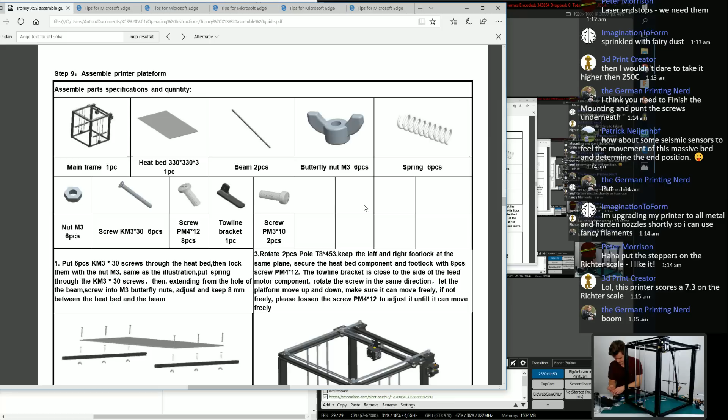No, 30 of course, M3 by 30. I got some of those. Organizing screws, how many did we say? 6. Yep. There we go. Okay, it's starting to get a lot of screws here. Boom! Yeah, that's one way of reviewing a printer.

This one is a 7.3 on the Richter scale. Cool, so where are my M3 nuts? I haven't seen any in the whole god dang build. I also feel that I'm getting some spots. M3 nuts, in here? Yes, in here. How many, how many? 6 pieces. We can do that. Cool, there we go.

Oh, this is gonna be exciting. It's time for the build bed, the build plate. Oh, speaking of that, guys, I just saw a metallic piece for that end stop. It's down here, so here that is. So we'll probably see if we can save it. Can we save it? Hopefully we can.

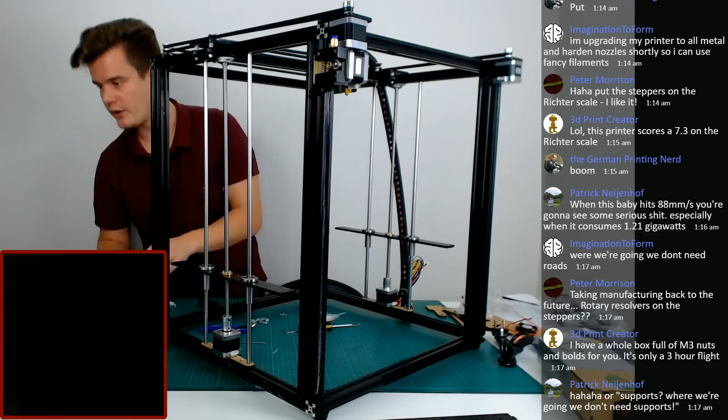These lights, studio lights here, actually put out quite a lot of light. I can really, I have my door open and it's, I don't know, 3 degrees outside, so it's actually kind of fun to have that going.

Okay, so let's go back to the menu here. We are looking at the build plate. So what are we wanting to do? We want to have, okay, we want to have like that. All right, so I'm going to pick up the build plate again. The question is, yeah, we don't want to use the glass surface right now. Okay.

So these ones here are symmetrical. Are they? No, they're not. Why are they not symmetrical? I don't like when things aren't symmetrical, that makes it harder to understand. Okay, but this one should obviously be over there, but it's supposed to be underneath. But it's probably easier to mount the build plate like this and then put it all underneath, right? Or am I completely... no, that should be good. Okay, so the plan now is to take...

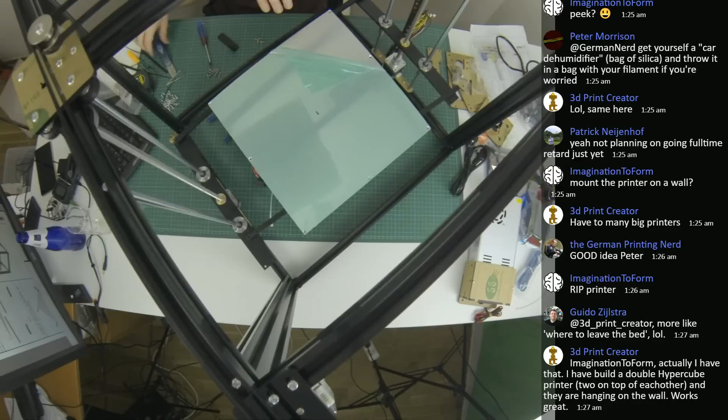Good question, oh that's a good distance, that's not an issue at all, it's like 4 or 5 millimeters, so that's not going to be an issue. But thanks, good tip.

Just gonna go down a little bit with that one as well. Everything's falling apart. Maybe I should wait with that a little bit.

Where am I? I'm here with the M4s. No, the M3s. Yeah, that's a... Where to leave the bed. It's quality.

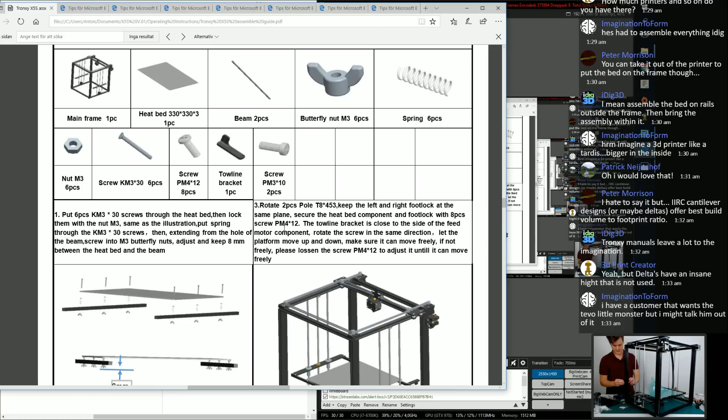I'm not sure exactly what it's for. It could be for the cables. It's probably for the cables.

And let's see, does it go on the upside or downside? It goes above, which is upside. Okay, cool, cool, cool.

This one goes over here. Screw loose, screw KM3.

Okay, so this is probably for the cable tray. I'm pretty sure it is. Or for leveling or something.

You really do, Guido, that's true. Master - oh my god, it's a Tevogate in the chat.

Let's see, where are we at?

Tevogate! That's fun, super fun.